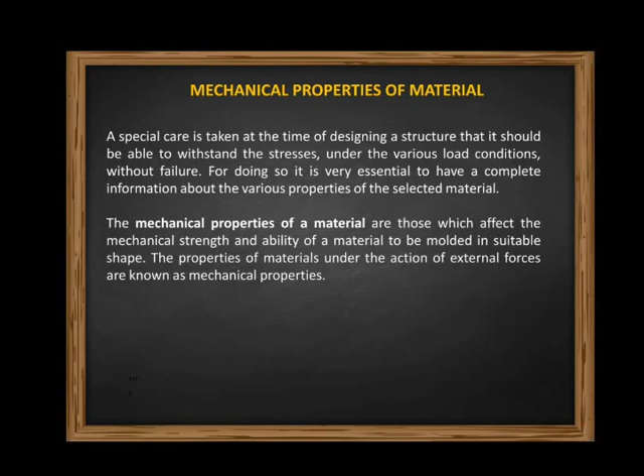So, the mechanical properties of a material are those which affect the mechanical strength and ability of a material to be molded in suitable shape. The properties of material under the action of external forces are known as mechanical properties. The mechanical properties which we discuss are stiffness, elasticity, toughness, malleability, ductility, hardness, plasticity, and strength.

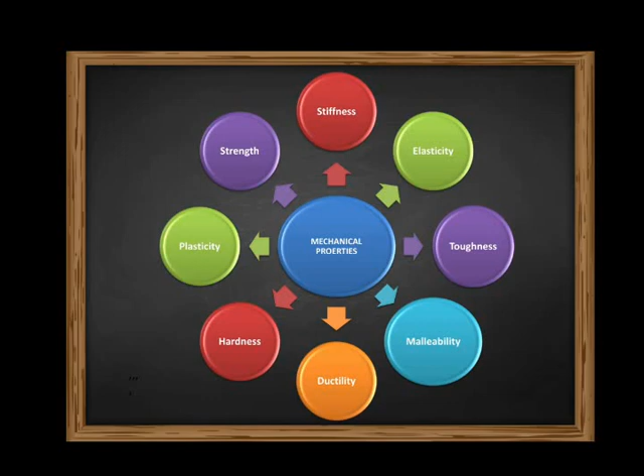Now, elasticity. Elasticity is the property of material due to which the material is able to regain its original position on the removal of load. In other words, the property by virtue of which deformation caused by applied load disappears upon removal of the load. Whenever a body is subjected to load, deformation occurs, and on removal of load, if the deformation disappears, then the body is said to be elastic. Steel and wrought iron are examples of elastic materials.

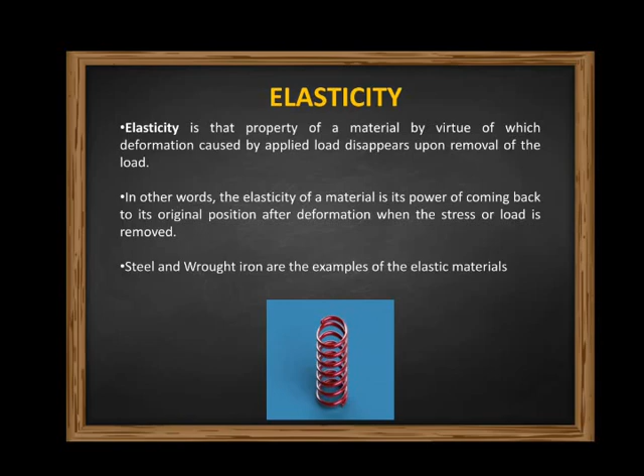Plasticity. If when the body is subjected to load, permanent deformation occurs in the body without rupture or failure, then the body is said to be plastic, and the property is plasticity. So, plasticity is the property by which a metal retains its deformation permanently when the external forces applied on it are removed. This property is important in forming, shaping, and many other hot and cold working processes. Materials such as clay and lead are plastic at room temperature.

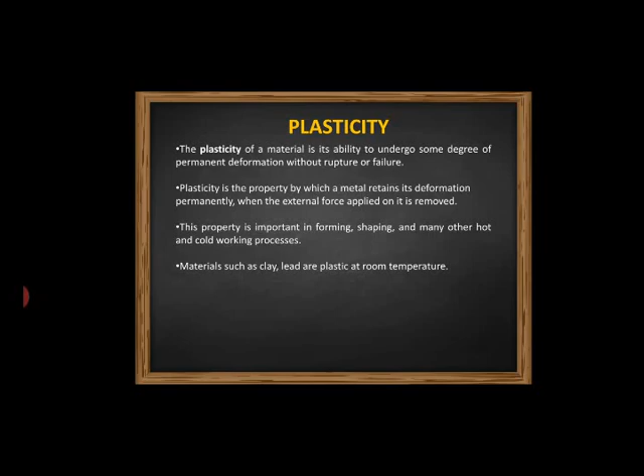It is the property by which material opposes deformation or breakdown when subjected to force or load. Material which we finalize for our engineering products must have suitable mechanical strength to be capable to work under different mechanical forces or loads.

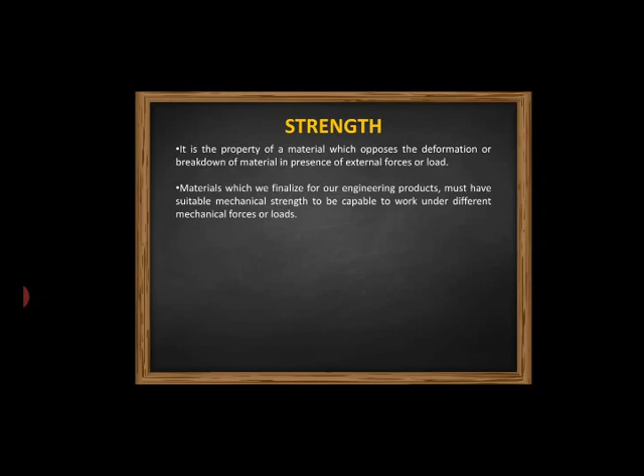Hardness. Hardness is the property of a material which enables it to resist plastic deformation, usually by penetration or indentation.

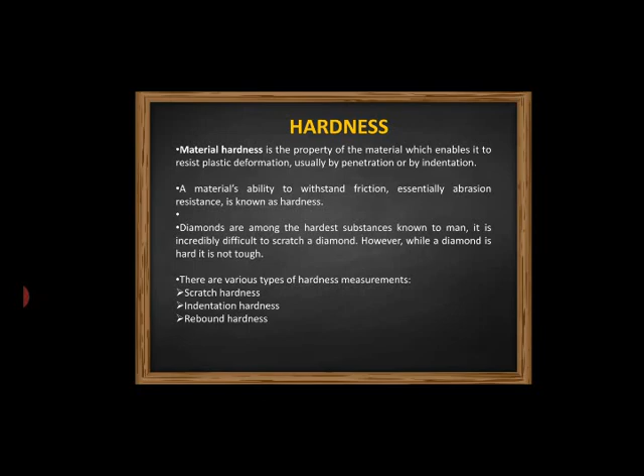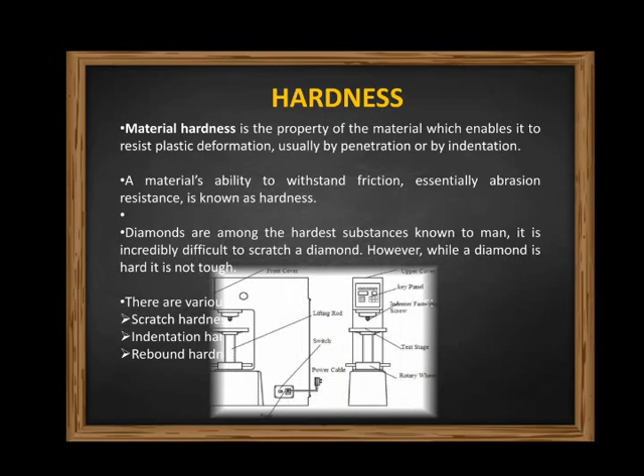It is difficult to scratch a diamond. However, while a diamond is hard, it is not tough. There are various types of hardness measurement: scratch hardness, indentation hardness, rebound hardness. This figure shows Brinell hardness apparatus. This instrument is used to measure the hardness of materials.

Next property is stiffness. Stiffness is force divided by deformation or deflection. So, the resistance of a material to elastic deformation or deflection is called stiffness. It is denoted by small k. The unit of measurement is Newton per meter, and the property is significant in designing of beam, shaft, spring, etc.

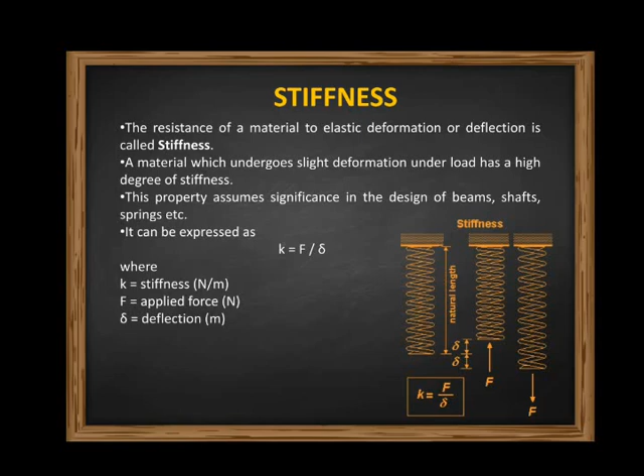The next property is toughness. Toughness is a property due to which the material is able to withstand shock and to be deformed without rupturing. Or we can say the ability of a material to deform plastically and to absorb energy is termed toughness. The key to toughness is a good combination of strength and ductility.

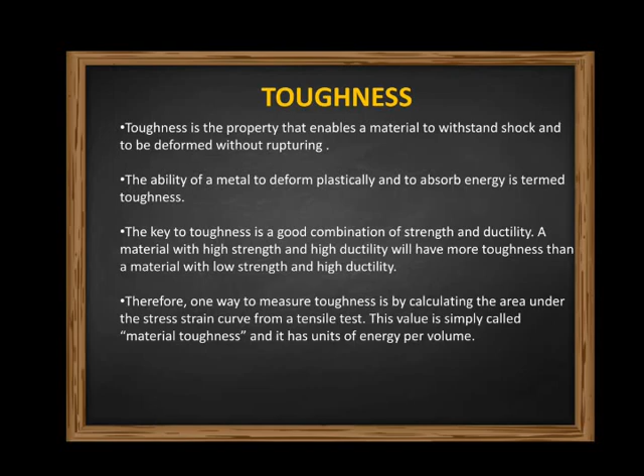Malleability. Malleability is a physical property of metal by which it can be hammered, pressed, or rolled into thin sheets without breaking. Or, in other words, the property of a metal to deform under compression and take a new shape. Gold is the most malleable metal. Gold is hammered into thin sheets. The figure shows gold is hammered into gold coins.

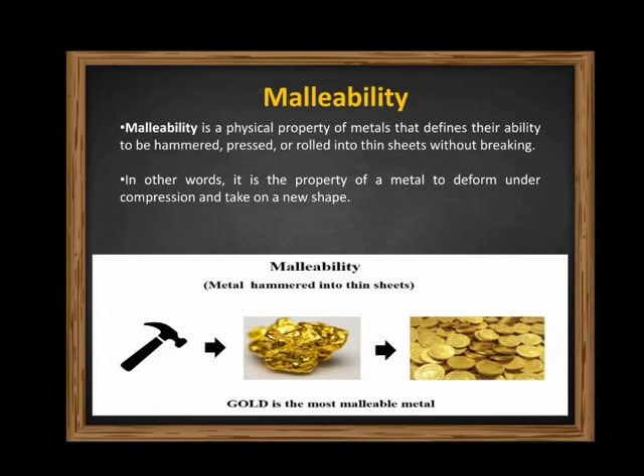Ductility. Ductility is the property of a material due to which it gets stretched into wire by pulling or drawing. It indicates how easily a material gets deformed under tensile stress. This mechanical property is also an aspect of plasticity of material and is temperature dependent. With the rise in temperature, the ductility of material also increases.

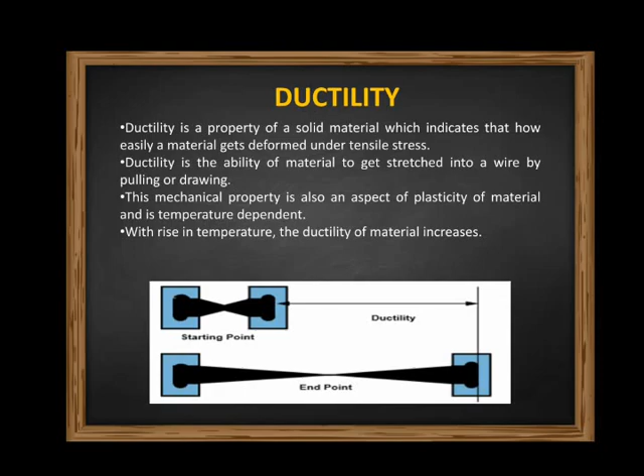The figure shows a material on applying force; it stretches, and the difference of the length gives ductility of material. Thank you.